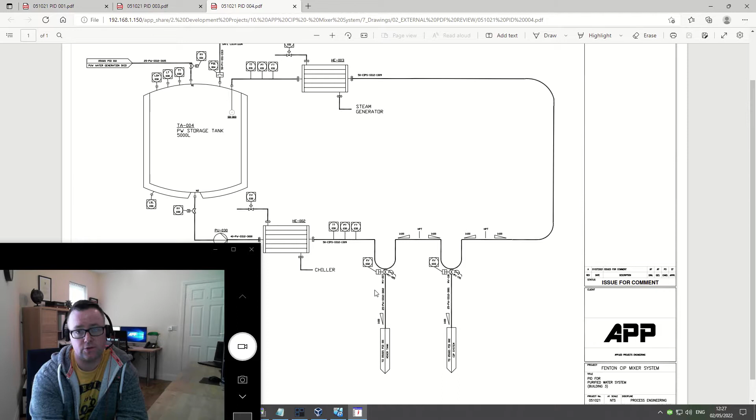I'll give an overview of the system. Basically what we have here is a mixing tank, and we can add in these ingredients here. In the background we have this purified water system, and then our mixing tank, which is a customer on one of the loops. Then we have this holding tank, which is when we've actually done our mixture. The mixture then goes down and transfers out here.

So I have a screen done up here in DeltaV, and I'm going to use this DVIO Watch application to give feedback where there's no physical system ready yet, to test. Here I have a faceplate where I can kick off my sequence, so I'll do that quickly. I've hit start, and you're going to see a sequence which is kicked off, and this valve up here represents the input in from the purified water.

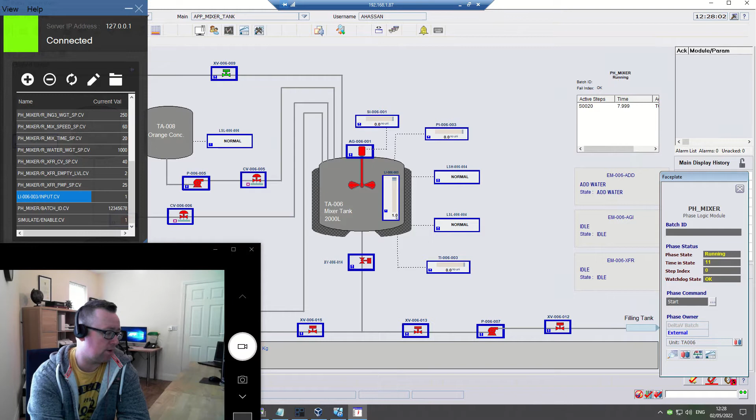If I go back here, you'll see this is the input from the purified water. I can use the DVIO Watch application to simulate signals coming back through the OPC interface. I'll give it a value of 1002, and all I need to do is double click. So I double click here, and I can see that the actual tank goes up to 1002.

It's great to point out that I can play with the recipe parameters as well, which is great. I can reset the recipe parameters or adjust them very, very quickly. So I'll just move my video monitor here.

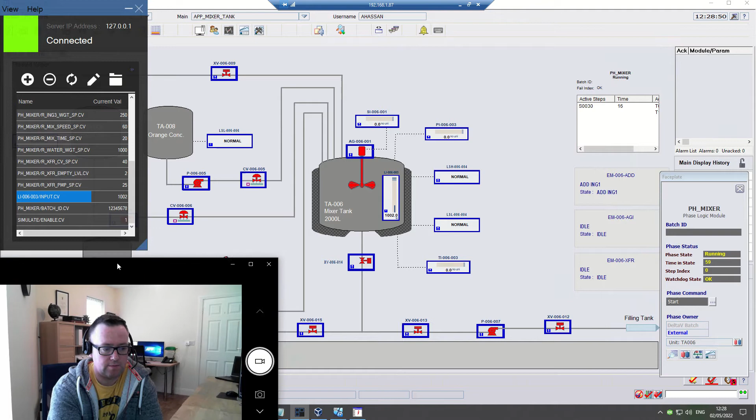What I can see is that we're inputting a syrup mixture. So the syrup mixture here, we have a pump and then a control valve. If I go back to the P&ID, I'll be able to see the pumps and control valves adjusting how much goes into the mixture.

So here I'll just modify again, I'll go 1203, just something slightly above what we need. We have an input then of 200. We need to show that we're able to input our ingredient. I'll give a double click again, and we'll see this guy jump to 1203. After that happens, these guys will cut off.

Then what we're doing is we're adding this orange concentrate next into the mixture. That's been set to have a value of 200 for when we have the ingredient 2 for when we have a mixture of orange set. So I'm going to adjust this guy up, to 1403 for example. We'll give him a double click, and we can see exactly where we are.

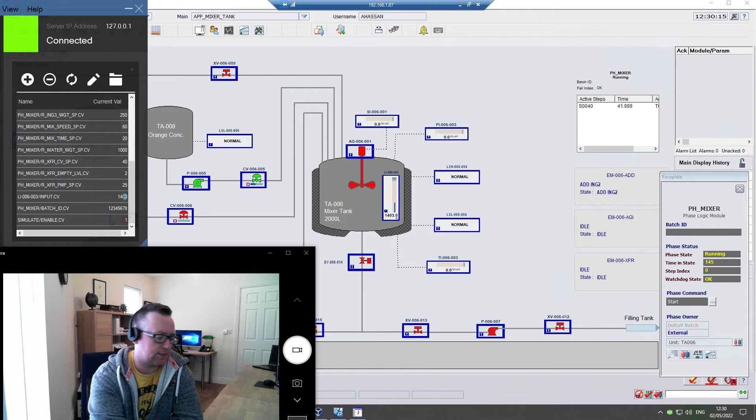Then basically what we're doing is we're going into a mixing sequence. We can see that we added our orange concentrate, we're not going to add them anymore. So we're going to agitate just for a period of time. You can see this guy here - this is where the EM for the agitation has kicked off, and he's going to do that just for a short period of time, for this demo.

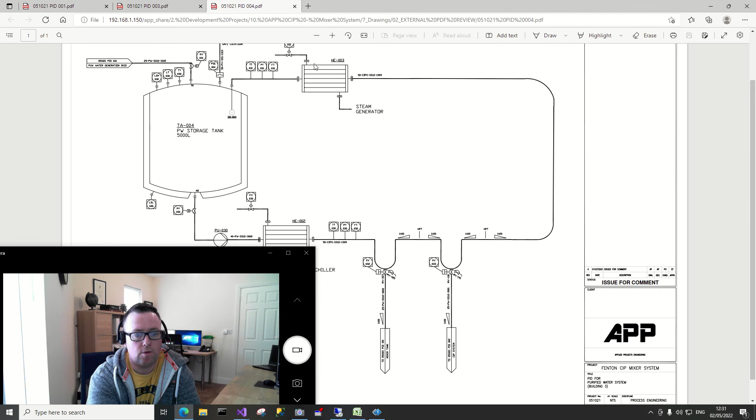We can adjust him as well here in terms of the mix time, say for 20 seconds and so on. So then we're going to go into a transfer. If I go back to the P&ID, what we have here is just this mixing tank, and it's coming in from the holding tank, and we just have this acting as a holding tank for a mixture. I'll just minimize that again.

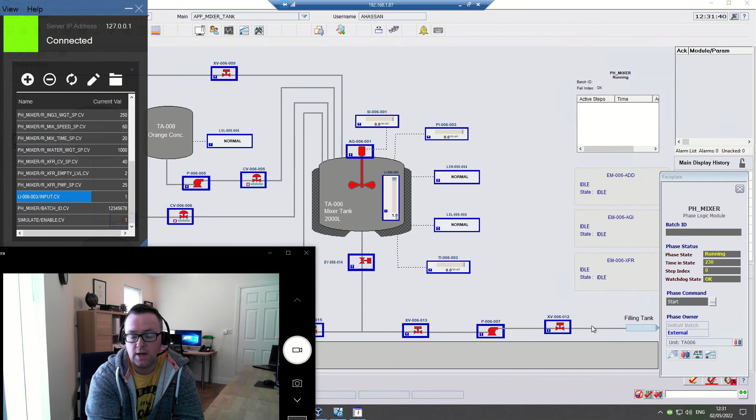So basically what we need to do is bring our level way down in our tank. Here I'm just going to type in 1, and give them a double click again. What we'll see is that as the tank level has gone down, the pump is cut off, and then the individual valves all cut off as well. We end up with the status of complete.

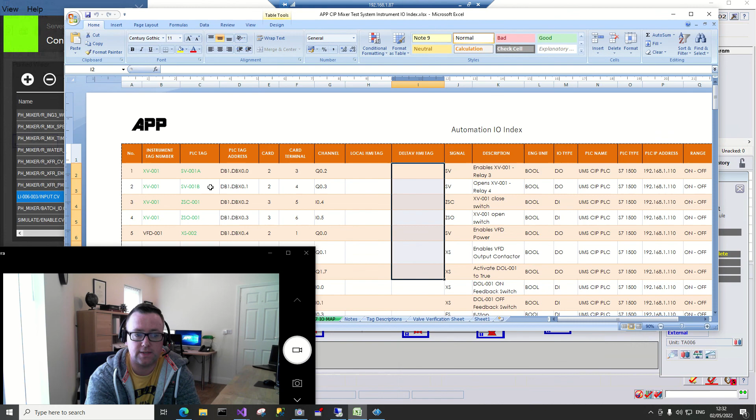This is just a kind of system that's being used as a demo. You can see there's the P&IDs, and it becomes very, very handy when you have an instrument index such as this, and you're trying to put together your DeltaV tags based on the physical I/O that are out in the field. It becomes very useful when you're adjusting recipes and changing variable names in real time. Thank you very much.